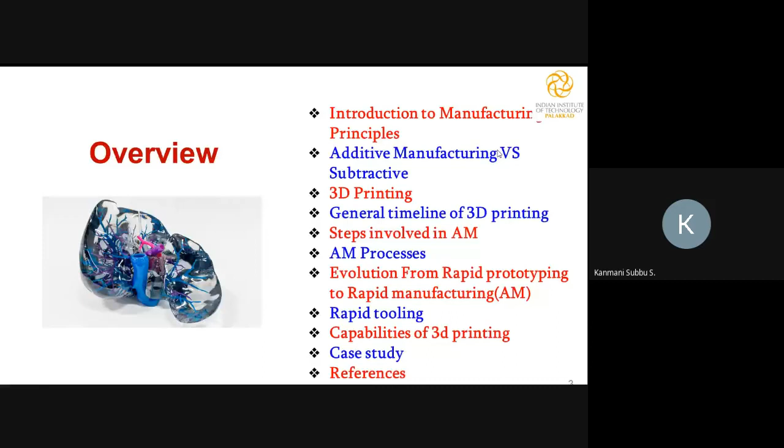Generally, we have to manufacture a product, and for that we need parts or components. So there are many manufacturing principles available to fabricate a product. Whatever manufacturing principles are there, they are classified under three categories: one is called formative, the second is called subtractive, and the third is called additive.

In formative, the name itself suggests it - it's basically a forming kind of process. In the overall manufacturing process, forming is one of the processes, so forming can be done. Even casting comes under the category of formative here - overall, the principle is formative.

And then finally, it's called additive. What additive is like - you have to make or fabricate a product by adding material, instead of changing the shape of the material or otherwise removing material. That comes under the category of additive. So these are the overall three manufacturing principles.

Especially, this particular workshop is concentrating on additive things, so we are supposed to know where additive stands now. For that purpose only, I added this.

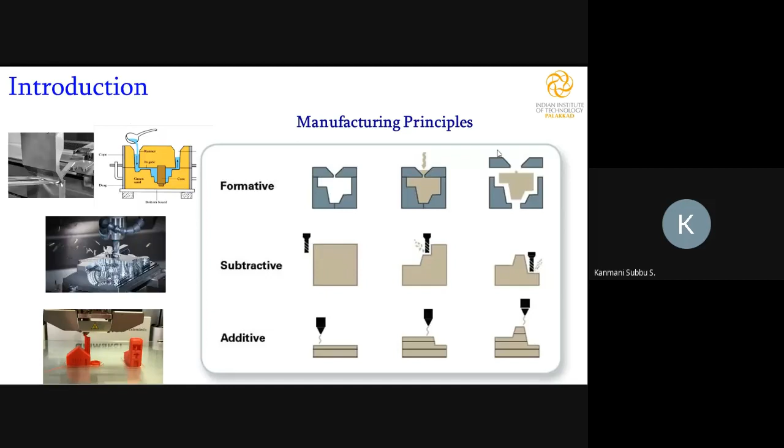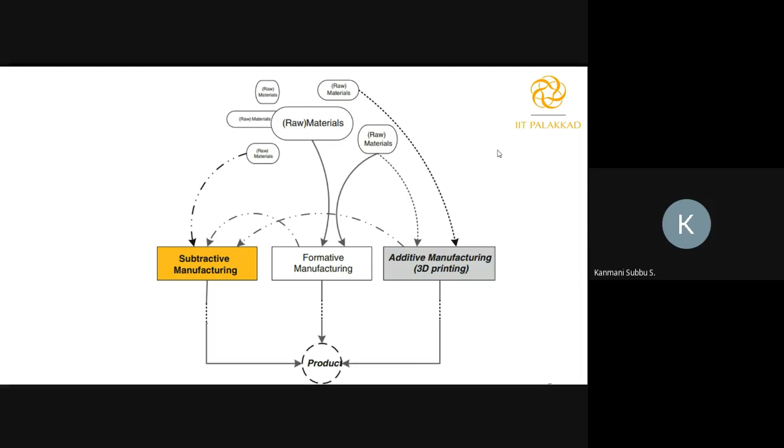So now, as I said in the previous slide, there are three basic manufacturing processes: subtractive, formative, additive. In each case, we need a raw material. For example, if I talk about casting, what is the raw material? We need metal scraps or metal powders - you melt it and pour it into the cavity to solidify and get a final product. Whereas in formative, your raw material may be a solid metal.

That material is in a particular shape, then you apply load to it and deform it, and you get a final product out of the forming process. So in each process there is a raw material necessity. In additive manufacturing too, we need a different type of raw materials, and the process is further classified based on the raw material we are using.

And the subtractive - as we know, we are removing the unwanted material from the given material. It is not only for making products. Even if you do either formative or additive, we need a subtractive process. Why? Subtractive is not only for making the final product, it also helps achieve a good finish on the product. For example, in formative you do casting and get a cast product, or you do forming and get a formed product. Then you do additive manufacturing and get an additively manufactured product.

All those products, okay, you made it, but is it in accurate dimension, or is it in the required surface roughness? So all those things sometimes can't be ensured by a single process - we need a secondary process. That's the way subtractive comes into the picture. With its help, we can ensure the correct dimension and the required surface roughness on the workpiece. So what I'm trying to say is these processes are dependent on each other - it's not like we can say they are completely independent.

Okay, so are you able to see my screen? Yes sir, okay thank you. So now I pose one question: in CNC machining, if I want to make a curved cut, how can I do it? Please participants, can you unmute yourself and say one or two answers so that I can move ahead.

Is it muted for all? Hello sir, is it muted for all? Hello?

Hello, sir. So can the audience speak here, or is it very difficult for them to speak? So it's clear, sir. For me it's okay, sir. But I would like to hear some answers from the audience. So can you allow the audience to talk? Maybe allow them to unmute by themselves, is it possible to do that? Otherwise it's very difficult, I have to only talk. Yeah, it is possible. Yeah, please. Then can you just tell me the answer?

Like, see, if I want to have a curved thing, it is very difficult by CNC. Okay, anyway, I'll just go with an answer. In CNC, even there, if we go and see the finer details, it moves in an XY manner only, not exactly a curve. So those kinds of challenges are there in subtractive. That may limit making complex shapes in the final product.

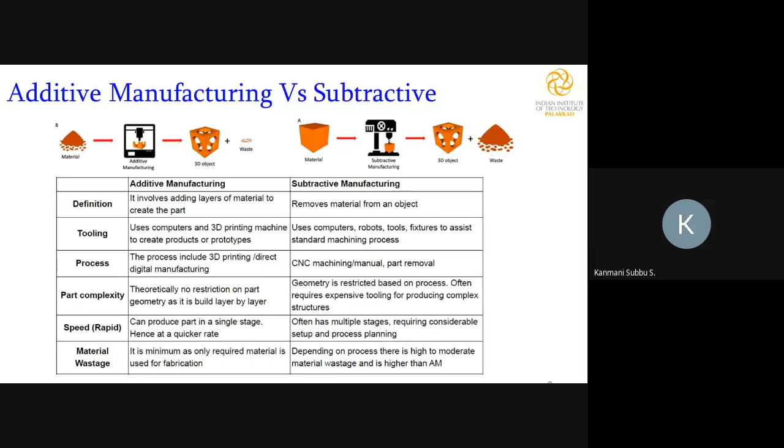If you get a CAD file of the part which is not working properly in your device, you just reprint it in your home itself and then reuse it. You don't even need to go to a shop for repairing those things. And it may produce covers and such things for devices. Artistic items that are very complex, very thin and curved in nature can be fabricated by 3D printing.

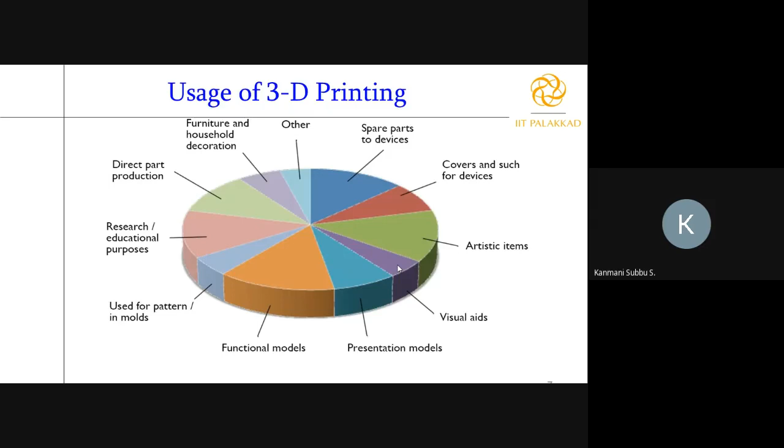Let's see here in medical. Can anyone tell what is the use of 3D printing in the medical field? Please unmute yourself and say. To make a bone. Yeah, very nice. So making a bone, yes, it is a recent thing that is happening. For example, implants and all, correct? In implants, you want to realize what shape of implant you want exactly.

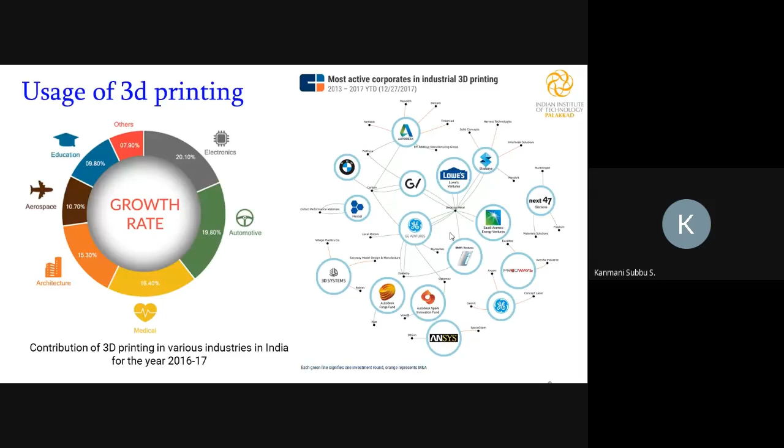So my title says a journey from rapid prototyping to additive manufacturing. We're supposed to know what a prototype is. Before we go into prototype, generally we use another term in parallel called model. So what is the difference between model and prototype? That we should know. Generally, a model we use to understand some particular set of concepts.

For example, I'm designing a cell phone. I want to know what overall size I can give the cell phone. So what do I have to do? I'm not talking about the functionality of the cell phone. Ultimately, what I'm talking about is overall size, because I want to handle it. It's not handling, I want to print that thing.

Okay, so cell phone manufacturing is a different thing. But apart from that, I want to realize it. I want to fix the dimension for the cell phone, the overall casing of the cell phone. For the casing, what I will do is I will plan something, and then I'll 3D print it, and then I'll check it. So the 3D print is not functioning. It's just a model. I want to know its overall size and how it looks. That I can realize. So it may be a different material or different size. It need not be the same.

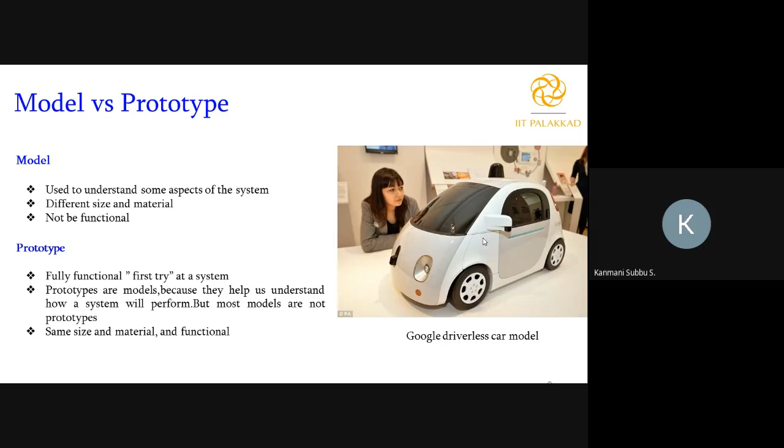Now, prototyping. So you understand the difference between model and prototype; we discussed that in the last slide. What is prototyping? Realizing the prototype is called prototyping. We call it rapid prototyping. Why is it rapid? That means the prototype should be done in a rapid manner. So can any one participant tell me why this prototyping should be done rapidly? Yeah, please. Somebody is saying, very good. Please proceed.

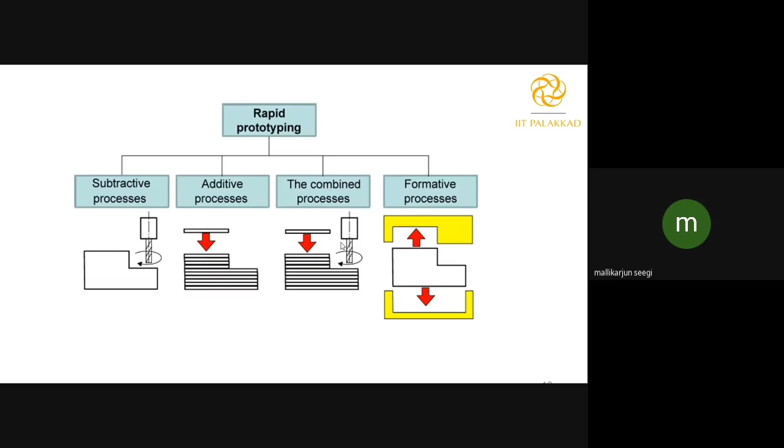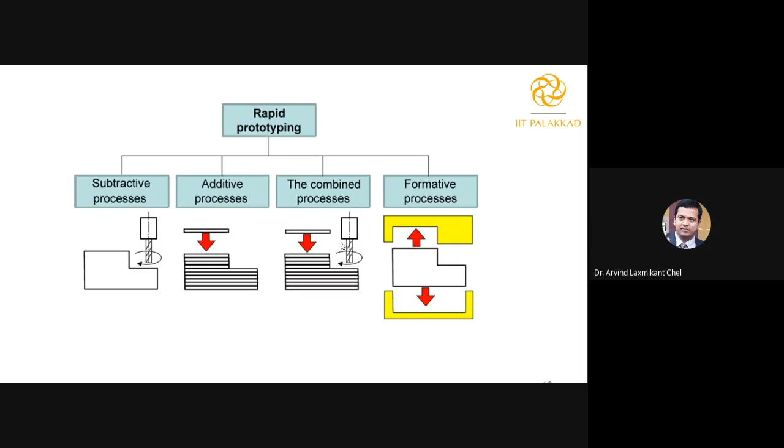Yeah, please. Audience. Product has to come to the market as early as possible. So we need to first design based on the prototype. Very good. Thank you, sir, for your good answer. So the prototype should be realized very fast. Then only I can meet the market demand, because the market is very competitive. Who is going to launch the product first? But it's not launching just any product. Launch a better product.

Okay, as compared to the other companies, my product is supposed to be good. It has to have maybe more functionality. It should be at less cost. There are many things. So to achieve that, rapid prototyping is necessary. Okay, this prototype model is not a new one. It is already existing. Okay, I hope you understand that.

Now let's see. That's the rapid prototype. Then generally, how are they making this model and prototype? Before additive manufacturing came into the picture, people generally used to do it by subtractive process only. Now they started to use additive manufacturing. So if I compare with subtractive or forming, if I make any product by additive, the processing time is very less, so this prototype can be realized in a very rapid manner.

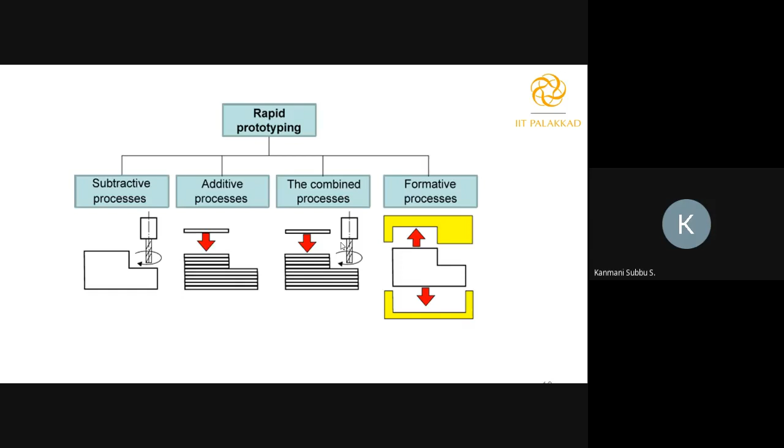So rapid prototyping, ultimately what we are trying to say, is called additive manufacturing here, or 3D printing; we'll discuss a lot about that. I'll go inside that right now. So I hope you understand why this prototype should be realized in a rapid manner to meet the current market demand, so that we can be first in this heavily competitive market. That is the ultimate thing.

So what is the general timeline of 3D printing? Where it started and everything. See, the technology started in the 1980s, and we are in 2020, only 40 years. In 40 years, see the maturity of the technology, where it has reached. As I said initially, in the future, in each and every house we'll have a 3D printer. That is the way we are going.

See, many programs are happening, workshops are happening, in schools people are teaching, and people are developing their own 3D printers. Research-wise also, more research is happening around the world. In the 1980s they started. It started from Japan, with Dr. Kodama, who started it as a rapid prototyping tool. He tried to patent it initially, but that did not happen because...

Participants, please mute yourself. Participant, please mute yourself, otherwise I can't go further. I request the host to mute them, please. I think the host has an option to mute the participants. Hello, am I audible? Yes, sir. Sir, I request you to mute participants, please, because maybe they are not aware of that. It's a really hard time because 12:30 to 2 is lunchtime, and they have been attending since the inaugural in the morning. So altogether, it's very difficult for them. Okay. Fine. I'll proceed now.

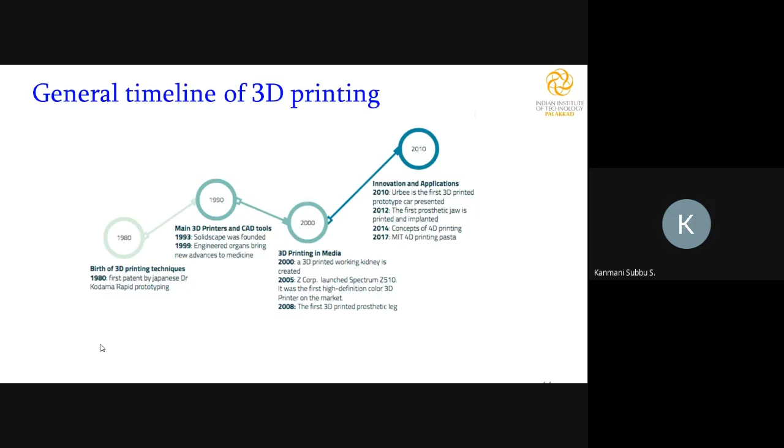Now food items are started to be printed by 3D printer. Say for example, you want to make pizza, or any South Indian items. You develop a setup, you know the methodology, use it, you print it like that. Instead of making a dosa, you print a dosa hereafter. These things will happen. Let's move to the next one.

So we just understood what is a prototype, what is a model, and the role of additive manufacturing or 3D printing in making prototypes, and the applications of that. So those things we have discussed so far.

But in this slide, it is very basic, related to 3D printing. So how to do this 3D printing? Ultimately, I want a final product, a 3D product. If I want to get a 3D product, I need data for that. Like the name itself, it is printing, a layer by layer printing. That means they are making the component by layer printing.

If I want to make layers, for example, I want to make a cylinder in 10 layers. That means 10 layers, if I do that, I will get a cylinder. If I divide the 10 layers, there are 10 layers and 9 interfaces. So all those 10 layers I want to print properly.

If I want to print 10 layers, first I have to make one layer. How to make one layer? I have to start from a point, make it a line, then make the line a track. From the track you move to the layer, and from one layer you move to the second layer. Like that it has to go.

In these 10 layers, 9 interfaces are there. This is overall about that. Why I'm saying about interfaces, I'll tell you later, but please remember that the number of layers minus 1 shows the number of interfaces. Now, what is the basic?

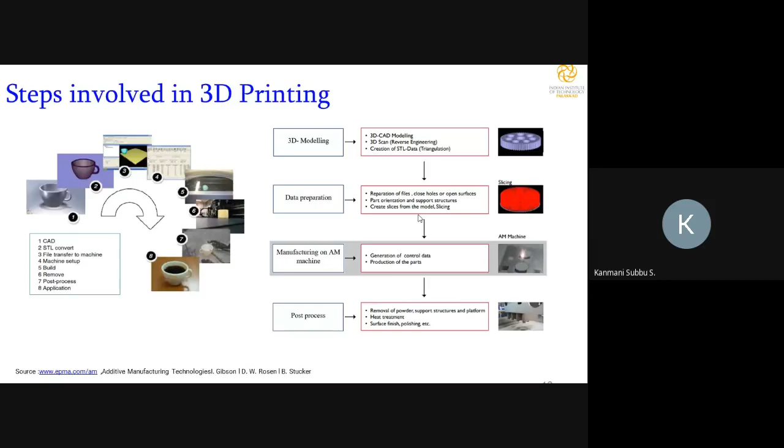So this is the overall flow of 3D printing: starting from the CAD file, converting to the STL file, sending to the machine, allowing the machine to print, then taking it to post-processing, then using it for the final application. This is an overall picture of additive manufacturing in depth. I'll move to the next slide.

Now a very interesting thing about additive manufacturing and 3D printing is how to classify it. Ultimately, what I said initially is deposition - that's what I just said. But now this process can be classified based on the material we are using.

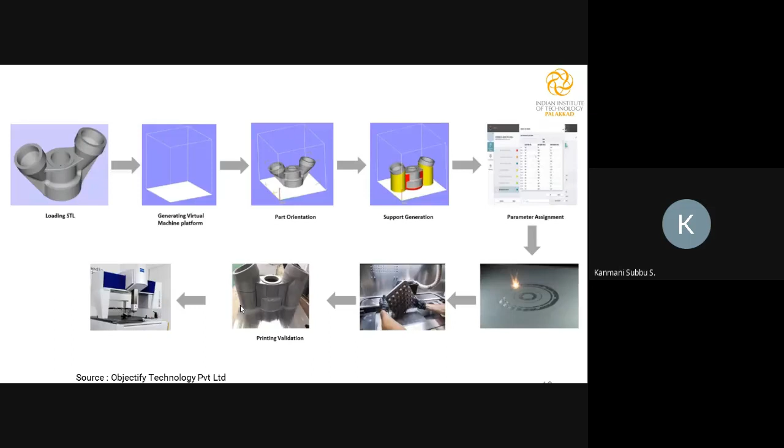So see, this is the way you have to study the process, and only then can we do research on that. Maybe most of the people are researchers or faculty members who are interested to pursue their career in 3D printing research. So I just want to discuss in that direction. Okay, I'll move to the slide.

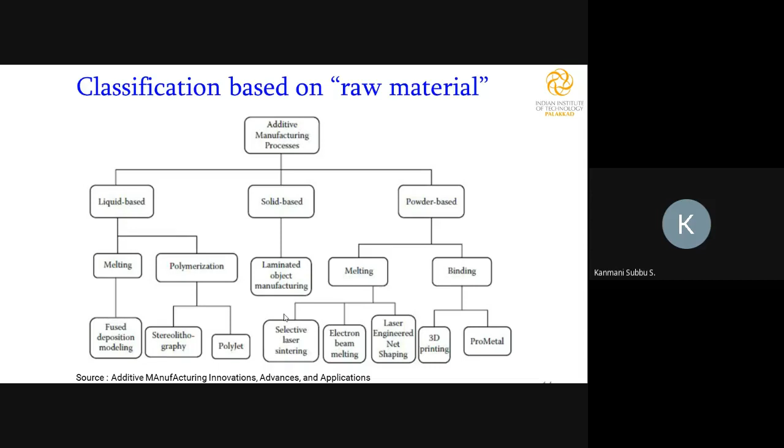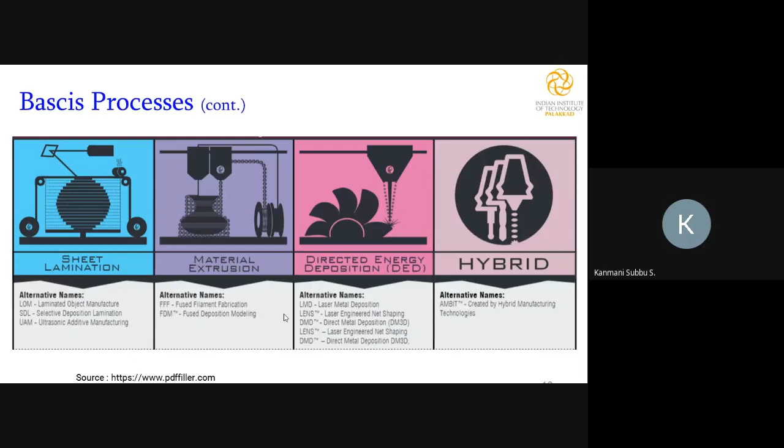So these are the 7 basic processes: vat polymerization, powder bed fusion, binder jetting, material jetting, sheet lamination, material extrusion, directed energy deposition, hybrid. These are the 7 processes. I'm not going to cover them in this; I'll go process by process in the coming slides. There are 7 processes I want to put in your mind. As per ASTM standard, there are 7 processes. Let's start one by one. I'll explain in depth later.

Let's start with vat polymerization. If you see here, as I said, your raw material is liquid. Finally, I need a product like this. So how to do it? I have to solidify that liquid. Since it's a polymer, I have to supply energy to it, then allow it to cure, and I'll get a product. But the problem here is it's not a single go. It's layer by layer. How to make it layer by layer? So that is the control.

Even though it is layer by layer, I can't make a single layer at a single stretch. Even a single layer, I have to start from point to line to track, then only I can do a single layer. In that case, the energy source is supposed to be very controlled. Which energy source will do that? For example, if I keep this liquid in a furnace, everything will solidify. Then where will I get layer by layer?

So that is the way it has happened now. In the liquid, they added photoinitiators. Whenever you add these photoinitiators, you use the laser source, UV rays. Whenever the UV rays fall on this liquid, it starts to cure. The laser is a small source, small in size, so I can have a controlled thing. If I want to make a layer, I start from the spot, a point. I pass the laser light: point, second point, third point, fourth point. I can do point by point.

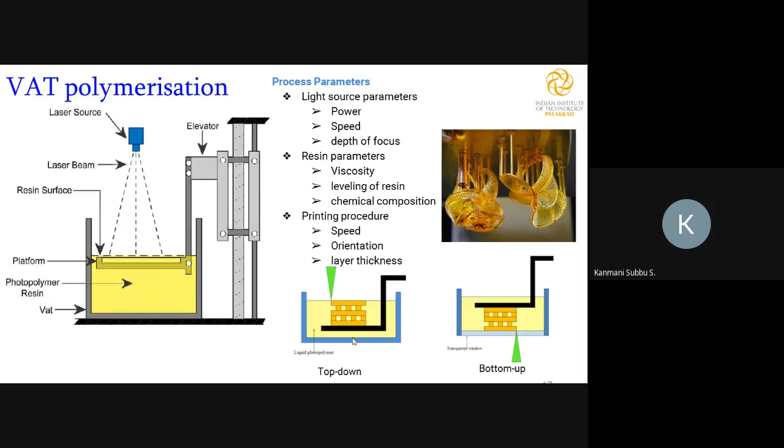This next one is called powder bed fusion. Your raw material is now powder. There are 2 options for making a product from powder. One is you have powder in solid form, make it liquid and then solidify. This can be done in two ways: you spread the powder and pass the heat source over it, or you send the heat source and powder together and deposit it. Here in powder bed fusion, powder is spread on the bed on a platform.

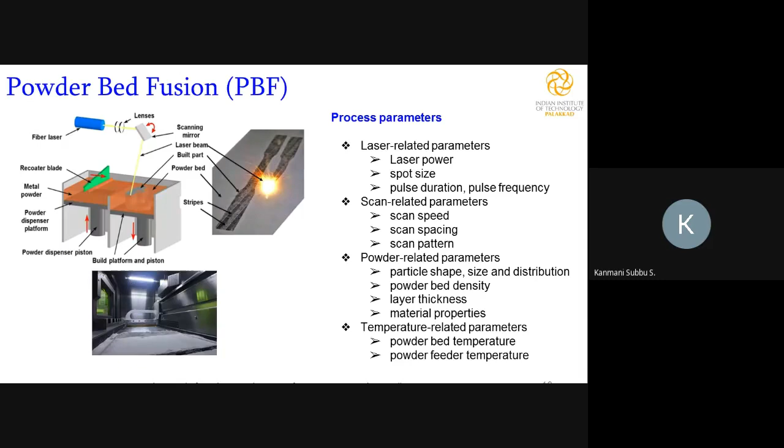Then you have to supply the heat energy, again layer by layer. That heat energy is supposed to be given in a very controlled manner. Whatever energy you're going to give has to be small in size and it has to melt the powder. So you should know the melting point of the powder, whether it is a polymer or metal.

Now you have to take that energy source, electron beam or laser beam, even plasma is also coming up now. You take that energy source in a controlled fashion and, as I said, go dot to line, line to track, and then layers. So here there is a platform with powder spread on it, and you see this laser traveling. Whenever it travels, it makes prints like this. It's a dog bone shape. They are making tensile samples to measure the tensile strength of the additively manufactured component.

So there's a platform like that. I said the platform is supposed to be filled with powder. So how to get the powder to the platform? They use this mechanism: there are two reservoir kind of things filled with powder. They have a piston arrangement. Based on your requirement, the piston will push the powder. If you want to push only one layer, only that one layer amount will be raised.

So this is also interesting: how many layers you want. And another interesting thing is that the powder may sometimes act as a support material for the structure. That is the beauty of powder bed fusion. So again, if you go inside, what are the parameters?

How to do your research? As I said, laser power, spot size, pulse duration. You can use continuous power, you can use pulse power also. So pulse laser, continuous laser, depends on the parameter. You can find out which is best and what is the optimized condition.

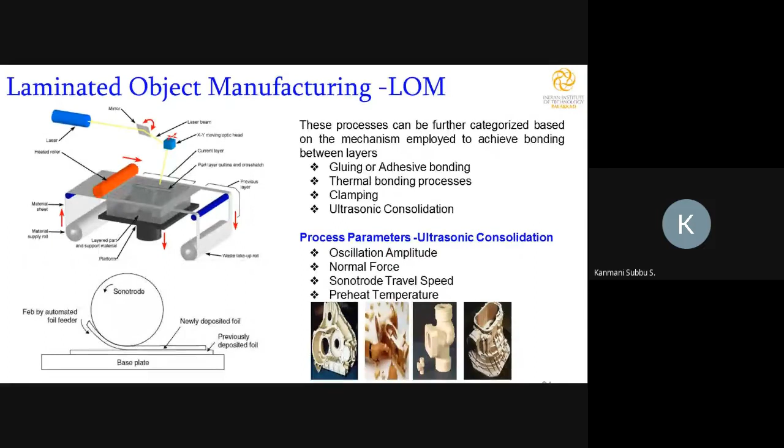Another very interesting thing: in most institutes, most people are doing research on FDM, fused deposition modeling. The material is extruded. Raw material is in a solid form, that is in a wire form, and from the wire form I want to get a solid form again. Here we make the wire semi-solid, and from the semi-solid we make a solid. Why semi-solid? Once it becomes semi-solid, with the help of the nozzle you squeeze it to whatever shape we want. That's why it's called material extrusion.

Here again, the interesting thing is we have build orientation: what build orientation I have to use, what layer thickness, what print speed, infill density. It's an interesting point. If I'm making only a model and want to know one particular outer shape only, not whatever is inside, I go with infill density. I don't bother about how much material is filled inside; I reduce it as much as possible to know only the outer shape. So that option is there.

Nozzle diameter also plays a role. Infill patterns are there: how to fill inside, what kind of pattern. There are different methodologies of scanning, raster angle, raster width, air gap. So all those things you can play around with. And then, as I said, temperature plays a role, extrusion temperature and print bed temperature. That also you have to know.

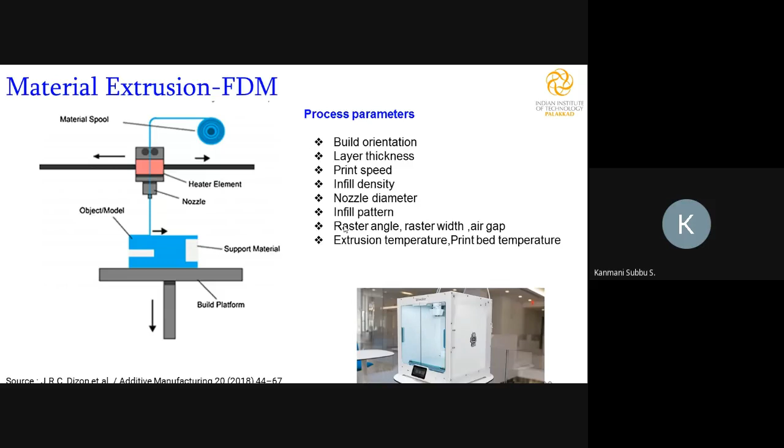The last one is direct energy deposition. As I said, it is like a complement to powder bed fusion. Here the raw material is in powder form, converted to a liquid form, and from the liquid you have to solidify again. So how to do that? In powder bed fusion you spread the powder, whereas here you pass the laser and the powder together. Powder and laser meet at one point and deposit on the platform. This is called direct energy deposition, because I'm depositing directly. In powder bed fusion we use a large amount of powder, but here with less powder you can get the product.

In powder bed fusion, for example, in one machine I need at least 20 kg of powder to work on. Now based on this process, there are many input parameters required: laser power, laser beam spot size, powder feed rate, scanning speed, carrier gas. It should be done in a particular gas environment so that it will not oxidize. Clad angle, feedstock properties, layer dimension.

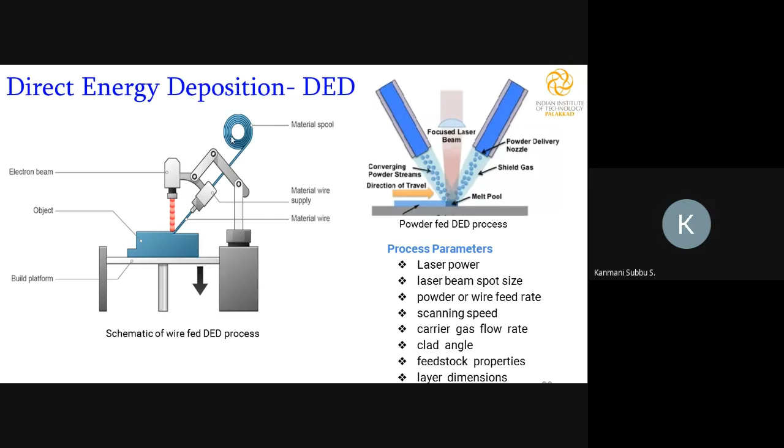Somebody said wire arc metal additive; that also comes under this category. See, this is the wire arc one and this is the powder one. They both come in the same category, direct energy deposition. So these are some basic processes of additive manufacturing.

Now I'll just talk about this journey. I said that we started from the model and prototype definitions, correct? The prototyping should be realized in a very fast manner. That's why rapid prototyping came into the picture, so that either a model or prototype can be done in a very fast way.

After that, the technology: in the initial days, while making this model or prototype, mostly we made everything in polymer material. Then slowly this technology started to address repairing issues. If repairing is needed in a polymer material, maybe you can go with a new polymer, but some materials are very costly.

For example, a turbine blade. There we are using a super alloy. Super alloy is very costly, and processing a super alloy is not easy. So if the tip of a turbine blade got broken, generally people used to replace it. Otherwise, the technology called laser cladding has come for repairing. Now additive manufacturing is being used to repair gas turbine blades. So first we started to use it for modeling and prototyping, then slowly moved to repairing by additive manufacturing or 3D printing.

Then third, slowly they started to use it for tooling. Initially in one of the slides I told that the tool doesn't mean a single point cutting tool. The tool here means: for casting, the mold is a tool. For forming, the die and mold is a tool. For machining, a single point cutting tool is a tool. So rapid tooling: one way is you make the product directly by additive manufacturing. Another way is with casting and forming, if I aid that process so that it can be done very fast.